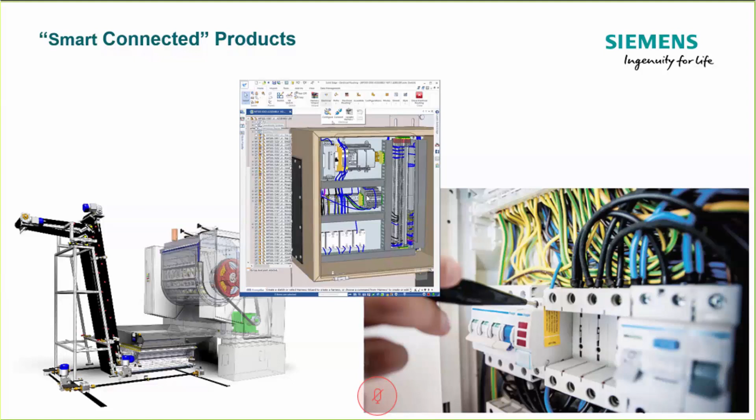Another good use for Solid Edge Wiring Design is in industrial machinery. Here we're showing what that would look like, where this is also referred to as panel design or control panel design. In this case, the end users are not so much interested in doing the harnesses that need to be routed through an assembly, but what's very important for them is to have that logical wiring diagram and the intelligence associated with it, so they know how these devices are connected together and do that very efficiently. So keep both of those in mind. Those are both very good fits for Solid Edge Wiring Design.

The leading industry technology. In 2017, Siemens acquired Mentor Graphics and picked up a lot of great technology.

But for today's discussion, we want to focus on Capital, which is an enterprise-level electrical systems wiring and harness manufacturing. It's been targeted for decades for the aerospace and automobile industry. Leading industry technology, best in class.

And the good news is for those of us that support the small and medium-sized businesses, this same software technology has been leveraged into the Solid Edge portfolio, and that new product name is called Solid Edge Wiring and Harness Design. So what you want to take away from this is that the software is the same, so it's not new software. Leading industry, very mature, lots of users, but it has been repackaged, rebranded for those that are working with Solid Edge or the smaller and medium-sized businesses.

So the price point is much lower, you get access to the technology, and the implementation is simplified because there's less configuration associated with it. So it's really important to understand where the software is coming from: the name is new at Siemens, but the technology is the core software from Capital, from Mentor Graphics.

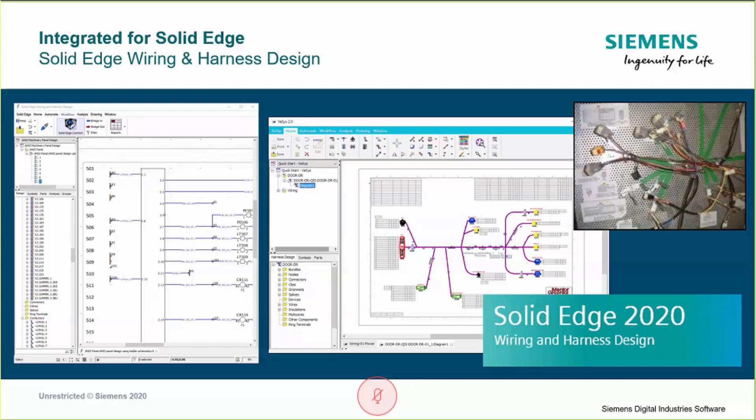And that's just underscoring the fact that they're typically working in isolated environments, and they don't really communicate back and forth regularly. And because of that, it's very difficult for them to be sharing the design data as they're developing this particular product. And the information exchange is very manual in nature and tedious. And that challenge actually gets more pronounced, especially if the electrical system is being captured in 2D drafting tools versus an intelligent wiring diagram. It really makes it difficult to share information.

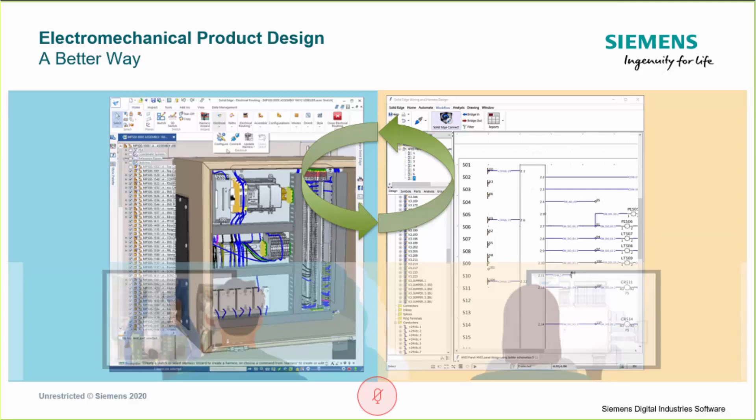So what happens is they wait till the last minute to make the exchange of data, only to find out there's issues and constraints that they didn't have before. And it makes it very difficult to come up with the options to resolve these challenges. So that's the traditional approach. But there is a better way, and that's what we'll be talking about today. Bringing those two environments together where we can have this bi-directional communication so it makes exchanging of information real easy in real time. So we can do it at the very start of the product design and continue that through the entire cycle.

So this is a good time now that I can introduce the software modules for Solid Edge wiring and harness design. So on the left-hand side here, I'm going to first introduce Solid Edge wiring design, far left. That's where users actually capture their wiring diagrams by selecting parts and symbols from an electrical parts library, which is part of the software. It's a centralized electrical parts library. As the wiring diagram is created, there's design rule checks that are running in real time to make sure electronically and electrically the diagram is sound and not violating various rules.

Also, it supports simulation, where the circuitry could be analyzed to make sure the function is proper as we look for the desired behavior. And we can also look at metrics like current and voltage to see that we have the wire size proper, for example. I'm going to show you that later in my demonstration.

Now, tightly coupled to that is Solid Edge harness design. And if you're one of those customers whose end goal is to manufacture harnesses, you will be leveraging this piece of the software. The wiring design content, the connectivity, is synchronized into the harness design. So that doesn't need to be recaptured. And then in the harness design, the user would add the physical pieces and elements to develop and build this harness. That would be the clips, the grommets, the insulation, and things like that.

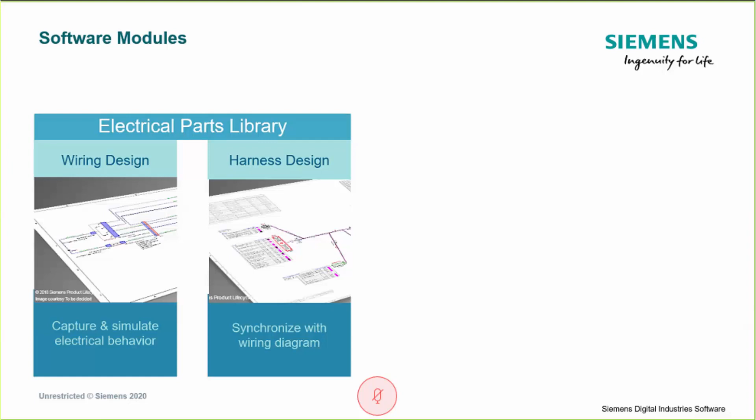All tied together nicely in one software install, using wiring design and harness design. So that's for our electrical systems colleagues. For the mechanical folks, they're shown on the right-hand side. They're in the Solid Edge MCAD.

And what's important there, in order to share information back and forth with our electrical systems team, we need the Solid Edge electrical routing shown here. That enables us to receive the wire content, have the ability to bundle them together in a harness, route them within the 3D assembly, and then send the information back to the wiring design schematic so we have the proper wire lengths.

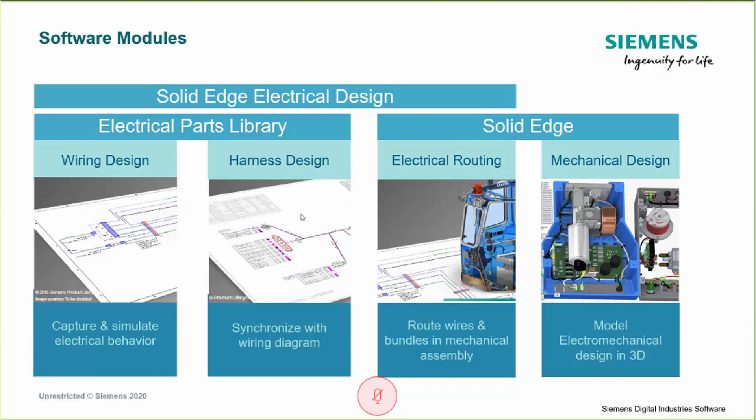This is what we're able to create with this integrated environment, bringing together the mechanical team with the electrical engineering team. So those are the names of the software that we'll be talking about today. My focus is on Solid Edge wiring design for this particular webinar as opposed to harness design. So we're just taking the wiring design. Perhaps at another time we'll focus more on the harness design.

So what I want to introduce and have you remember from this webinar is that Solid Edge wiring design will create intelligent diagrams, and you'll see what I mean by that. We're going to be building the diagrams by selecting symbols and parts from an electrical parts library to make sure the content we put in the diagram is correct. And you'll learn that we have features like styling, which enables you to have your company drawing standards followed by the entire team. It's automatic. It makes the schematics and diagrams easier to read and share with others.

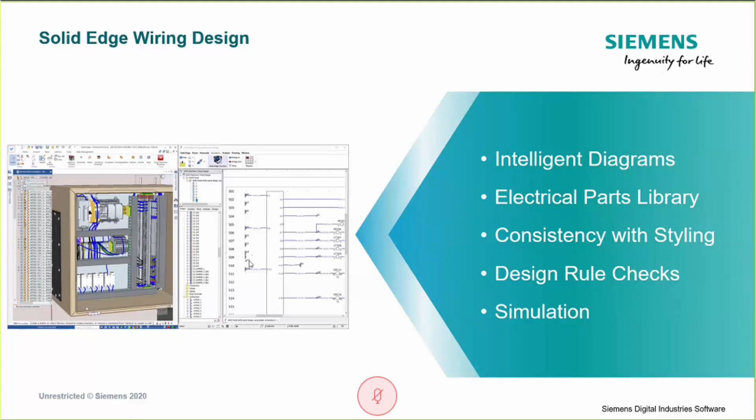You'll learn too that there are design rule checks running in the software in the background to make sure we haven't violated some type of electronics check that is important to us. And then also there's simulation. So keep those in mind as we go through the webinar. For the electrical parts library, there is a starter library that comes with the software. Currently, that starter library has over 4,000 symbols and parts, and this is where you do your component management.

Now, your team will also add your own symbols and parts depending on the industry that you're in and the standards you want them to look like. But the main thing is that's the core underpinning of this software, so that your team is selecting parts from the same centralized library. That's your golden IP to make sure that what you put on that schematic is correct. It has your company part numbers and any other information you want associated with that. There's an electrical parts software utility to help you manage this. It's all part of Solid Edge wiring design.

And what's important to understand here is there are relationships to the parts. For example, when you put a device on your wiring diagram, that device has specific connectors that go to it. And those connectors have certain cavity groups and cavity properties. It's very much aware of what terminals can go into those cavities. And for those terminals, what are the wire configurations that go in there? What's the maximum size of the wire? If I have more than one wire in there, what can that size be?

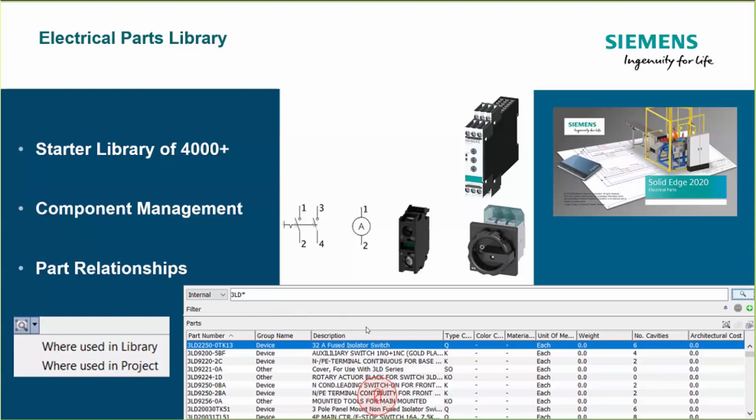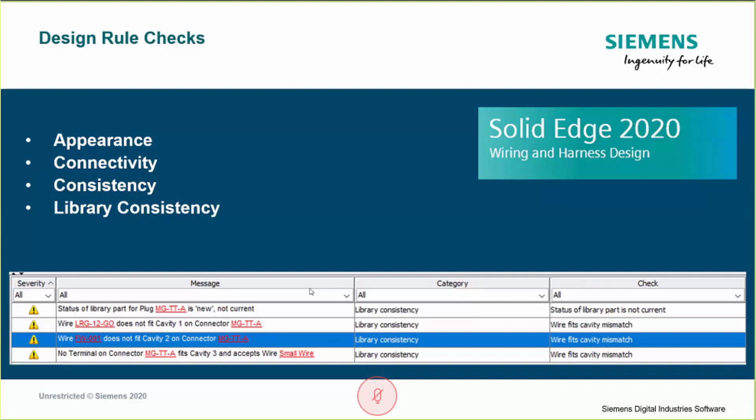And so this check is going on in the background and identifies to us immediately: you've got an issue here, you need to take a look at it. And the red text is a hypertext. I click on that and it brings us exactly into the drawing where this is the case, so it helps us fix and clean that up. So that's an example of these design rule checks that go on for you.

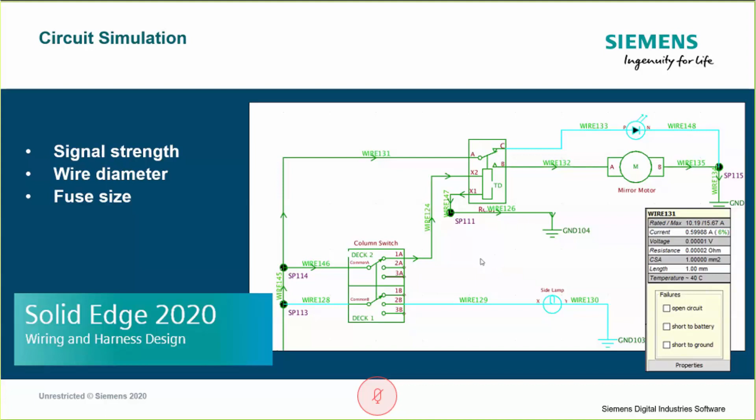Remember, we talked at the very beginning, right? Companies are under a lot of pressure to make their products stand out with electrical features, performance, quality, all of those compliance checks. This is a great tool to let you look at your design in this virtual environment and see if you're on track with the decisions you've made. Should you change the wire diameter, right? What's the impact of doing so? What's the impact to the mechanical design if we can use smaller diameter wires? So this is the tool that allows you to do that.

Now, I'm going to talk a little bit about the data flow because I want to present the big picture of where you enter data and how it's shared, right, which is very powerful in the efficiencies. So to begin, in a wiring diagram application, again, we're going to be pulling the symbols and parts from the electrical parts library. And anytime you're ready to share that diagram with your MCAD team, we can share that information with what we call connected mode. Connected mode is a term we use at Siemens that references the ability of sharing data bidirectionally between the electrical system tools and the MCAD tools.

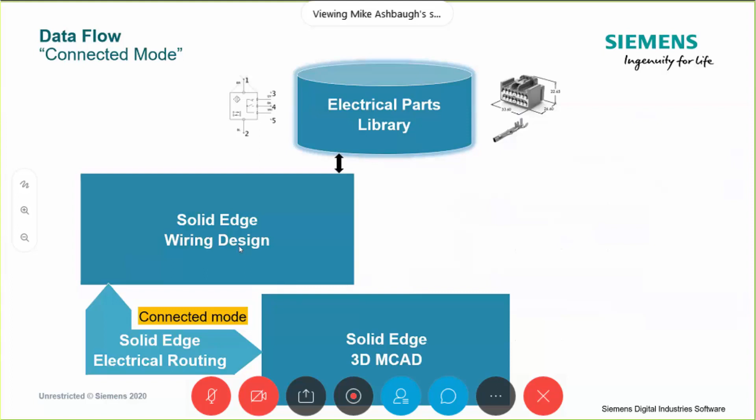So if you look at the image now, we show the connected mode, where the electrical systems teams in Solid Edge Wiring Design bridge out data to the Solid Edge MCAD in the 3D environment. Now the 3D MCAD has the wire information and the connectivity that was created in the wiring design. Nothing had to be recaptured. There's no mistakes with translations. It's not manual in nature. So recall that traditional method where we had the isolated environments. We just bridged that gap, and now we're able to exchange data very conveniently.

Our MCAD team would then bundle the wires together, route into a harness, route those as they need to meet their constraints, again, trying to optimize their design for space, weight, whatever that is. Once they're done, the length of the wires can now be shared back to the wiring design with a push of a button called Bridge In. And I'm going to show you this connected mode as part of my demo.

Now with the Bridge In, the electrical system team has the actual lengths of the wires. And because we can do simulation, they can now look at this again and say, look, if these wire lengths have changed, if they're longer than what we assumed, will we still get the performance? Will that signal with the wire diagram we have designed now actually reach the receiver so that the signal is strong enough for the voltage? If it's not, we would run the risk that the behavior of our electrical systems would not work properly.

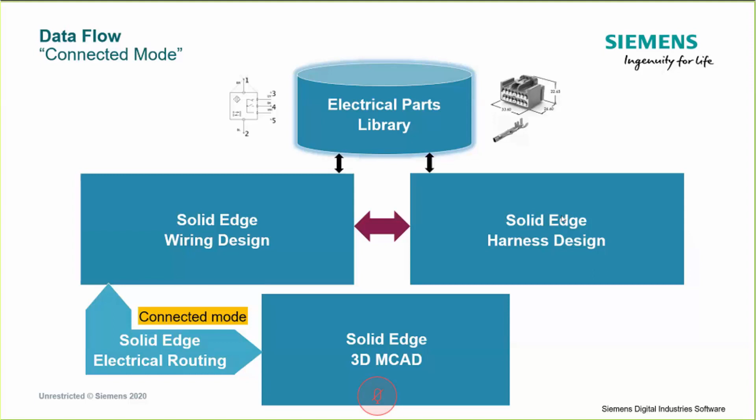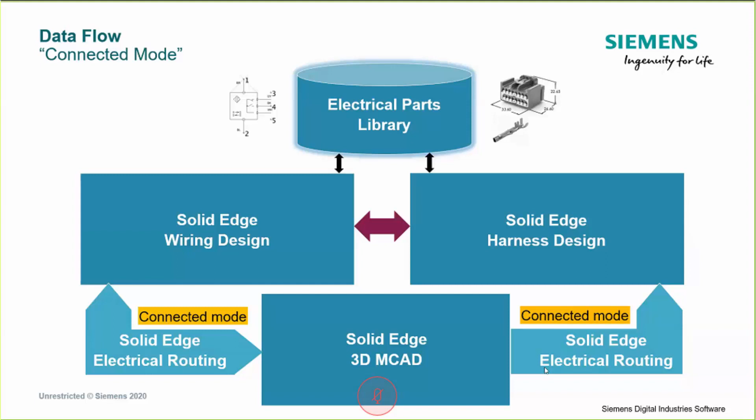Okay, I'm going to get into the demonstration here and show you the Solid Edge Wiring Design. I'm going to assume everybody can see my screen properly. Okay, you're looking now at Solid Edge Wiring Design, full screen.

And what I'm going to do first is just bring up a project that's somewhat completed and show you the anatomy of a project. How is the data organized? How do you find what you're looking for? And some of the outputs we can generate. And then I'll move on to show you how easy it is to create a new project, a simple little circuit, and run a simulation.

So I'm going to open up a project here called Electrical Systems. Let's take a look at that. So I'm looking at a project browser here. The name of the project is called Electrical Systems. And in this project, I can have more than one design. And the designs are shown in the yellow folder. So I do have a design called Analysis. There's a design called Connected Mode, and so on, all the way down to Wiring.

Each design can either be a wiring design or it could also be a harness design. Let me just show you what a harness design looks like. We won't go into more detail, but double click and I bring up the diagram for the harness design. And what we're looking at here is all the details that are captured in order to build this harness, if that's what you're going to do.

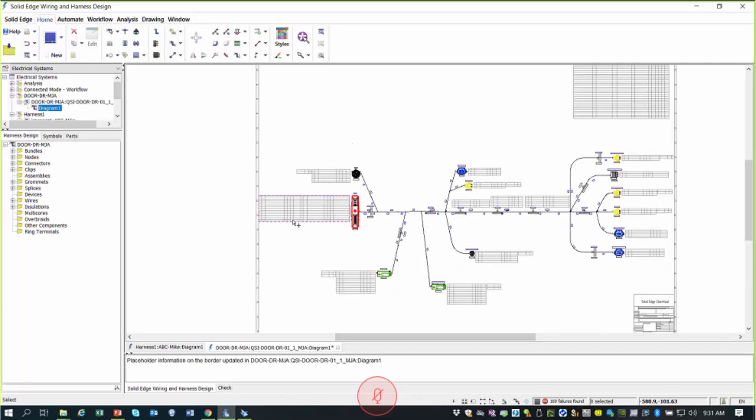If I zoom in here, these are all the cavity information for this particular connector. All this information comes from the electrical parts library, and we have everything we need. And from here, we can generate the documentation to actually have this harness built. So again, we'll save this for another webinar some other time, but that's the harness information.

So let's go take a look at a wiring design here. This particular design called Wiring is showing 10 various diagrams or sheets, all consistent with the same design. If I double click on number 7 here, this brings up that diagram that has been created and captured. What I first want to point out is once we open up a diagram, we now get the design browser shown at the left-hand side.

The tool automatically organizes these subfolders in our design called Wiring. So we have devices, connectors, inline, conductors, multi-cores. That's automatically created. And as you add elements onto your drawing, the software puts those in the proper location so you can find them.

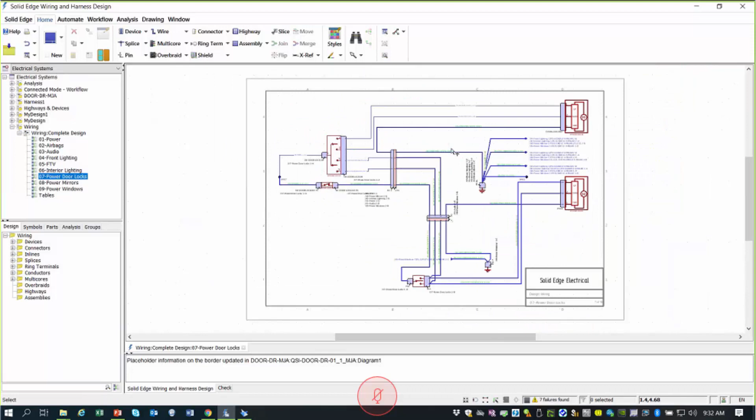This tool is very advanced. You've got the middle mouse wheel and it supports strokes where you hold the middle mouse wheel down. Those of you that have used some high-end digital capture tools, it's very common in those tools. When I select an element in the drawing here, notice that it also cross-probes with my design browser. And this is in the devices.

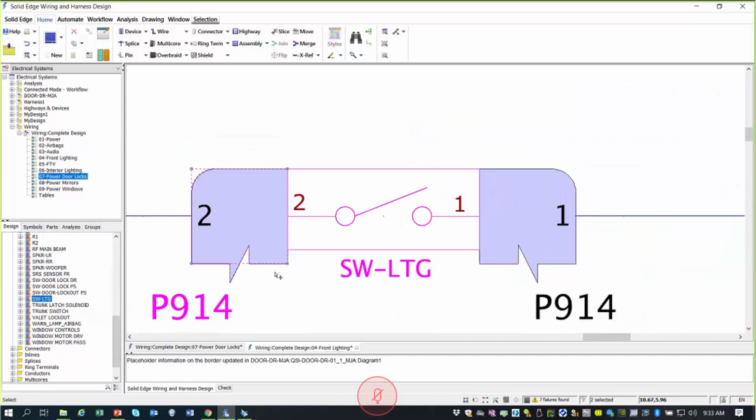Now you can see there's a long list of devices here. And that's because it's showing me all the devices in the entire design, which consists of 10 sheets. If I go in here and I find something like this, I say, where is that? I can hit the Z and it'll browse to that particular drawing where I can find that device and take me right to it. So it opened up the drawing and found that for me. So it's a good way, as your design grows in complexity, to be able to find that.

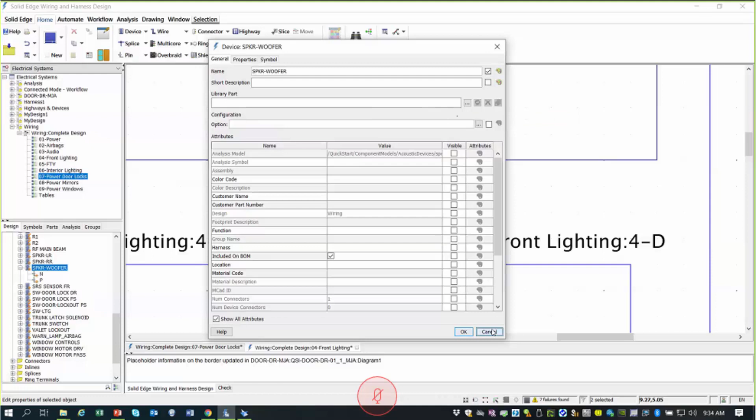And all the properties associated with the device in here, we can change those properties and view those properties with the right mouse button. And you can change the name here in the design browser, or you could change it in your contents window on the drawing. And you're going to see later on that this important field called library part is where we can do queries into the electrical parts library, and then add the parameters that are associated with the part.

The other thing I want to show too is sometimes you just want to isolate the view for the active schematic. And we can do that by toggling this button down here. And now it's just going to show me the devices that are associated with this active schematic sheet here. So that's actually how that works, and how we navigate through the project.

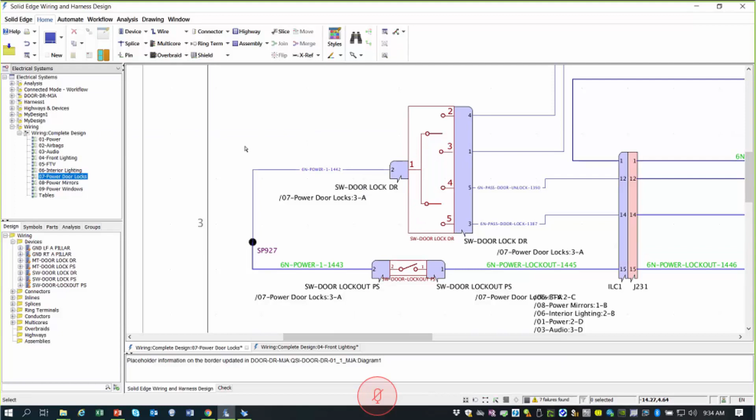The other thing here is, let me go to the styling here and point out a little bit. Here's a wire. Again, all the elements on a drawing have properties. I can do a right mouse button, properties, and here's the color of the wire, the name of the wire, the material, or it even has a part, right? So you have all the details, and I can make changes here. If I wish, I can make changes in the design browser.

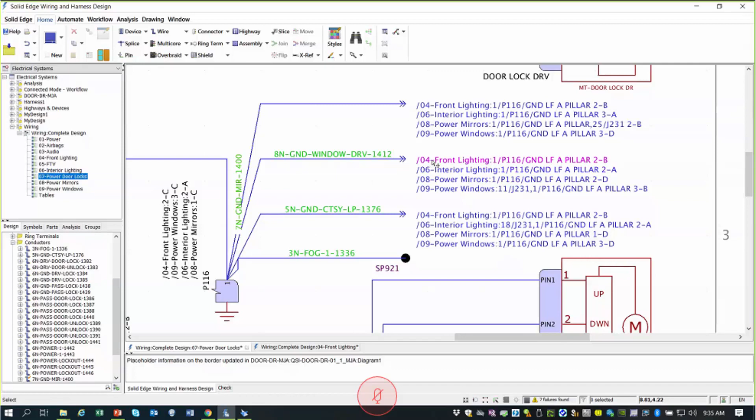But for styling, what I wanted to show was this wire may be in some other place in our drawing somewhere. In order for us to find out where that is, we can put on these off-sheet references. And this is an option that your team gets to pick. And in this case, if we're looking at this one and say view related items, it's showing us where else we could find that. So I could click on this and it would take me to that spot where I can actually find that other wire.

And what we're looking at here, the syntax is what I wanted to point out. These are called off-sheet references. Your team gets to set these in the styling set. So what is the syntax you'd like to use to describe where we can find this wire? In this case, it says go to the drawing name. That's what the 07 power door locks are, for example. It has the component and the pin number that you can find it. And at the very end, the 3-D, that tells us in what quadrant within our title block we can find that. So if you wanted something shorter or different, you can do that all in what's called the style sets.

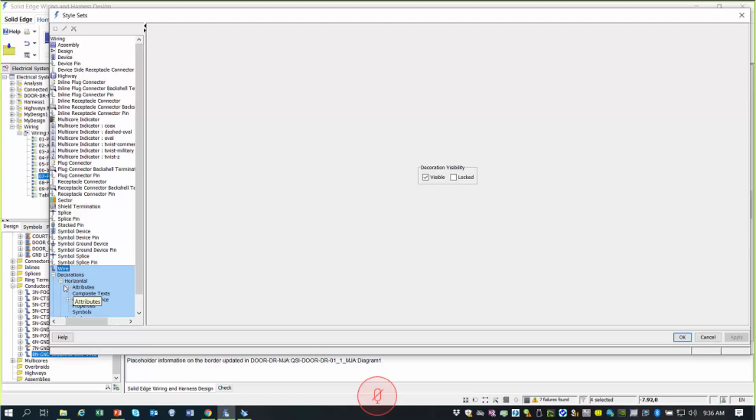And to find the style sets, I right mouse button after picking an element, I hit style, and I hit edit style. And it brings up this style set dialog, and it's highlighted in blue. Where can I find the details to actually change the name and the naming conventions? So this is where your team would decide how you want it to look. That's stored in the style set. And now anyone using the tool in your environment will have the same look and feel when it comes to creating the drawings. And that just makes companies able to standardize, right, and make the designs readable.

Okay, what's important here, once you've captured the details here, it's important that you know how do you share this data with others that need it for field maintenance or something like that. One of the things we can do is take this data in the schematic and generate a PDF for it. There's a really easy print to file. I can set the scope. Do I want to generate the entire project? One of the designs within the project, I can pick all that. And then you have naming conventions. How do you want to name the files based on some of these smart parameters?

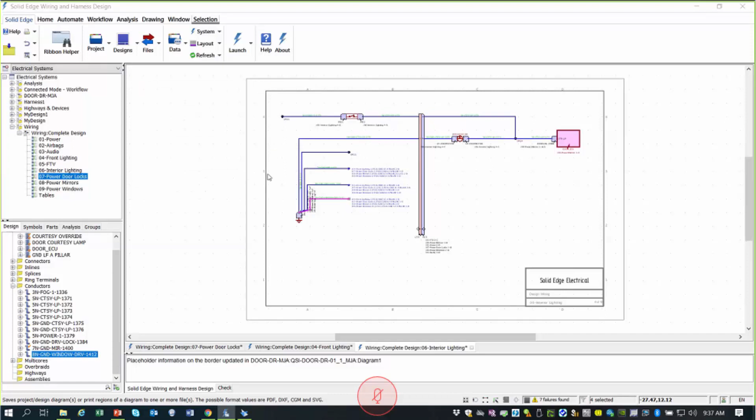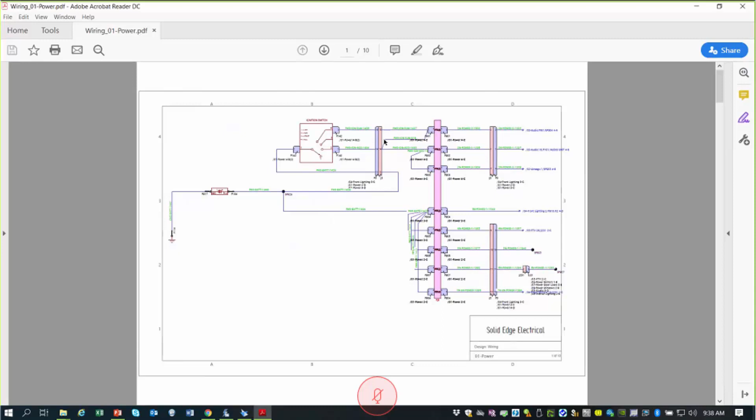Let me just click OK to just get this going quickly to show you that. And then in the output window down at the bottom, if I just double click the name, it'll bring up the PDF for me. And so here's my 10 sheets. I can browse just like I could in the design itself over here by picking this up, and I can navigate through this. So this is pretty powerful. A lot of times people need a printout of their design because they need to share it with their team. And you can search this. For example, you can do Control F and hit search and go find quickly where these wire names are or a component or something like that. So let me just close the PDF real quick.

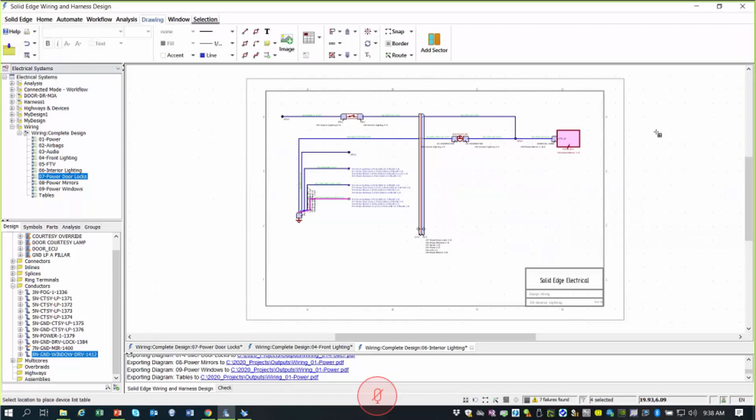And then another thing real quickly before we leave this project, under the drawing tabs, there's a number of tables that you can create. You can create a diagram list, a device list, a wire list. This, again, is the benefit of intelligent wiring applications. All the content that you need is captured in the drawing. And then you have access to it through tables and lists. So device list, for example, automatically generated. I can place this list anywhere on a separate sheet, wherever I want.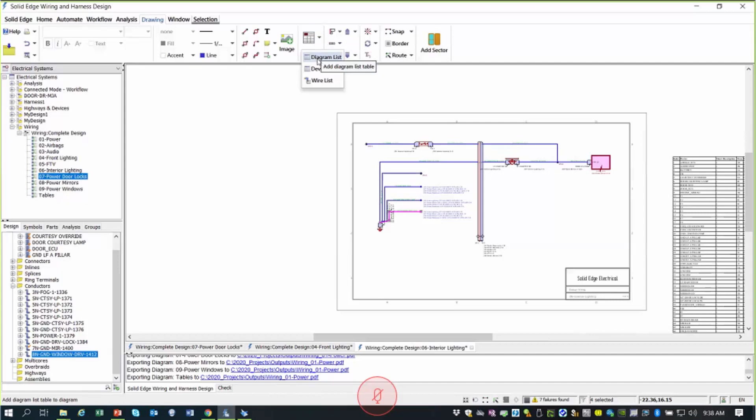You went right to my cursor. I'm going to just zoom in so you can see this. This is actually a dynamic list, right? So if I change any device on my drawing, it will update this automatically. And to show you what I mean by that, let me do a simpler case here. This will show me the diagrams that we have in this design and the name of them.

And for example, if I go to my diagram number 2 and I say, look, I want to edit this, and let's call it airbags 3, click OK, and now it updated that. So again, I wanted to emphasize that that's the benefit of intelligent wiring software, because you enter this in one place and it gets updated and it automates this process for you.

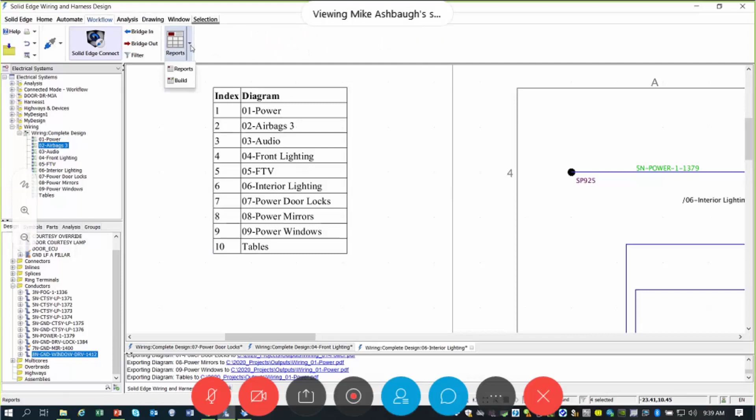Under the workflow, there are a number of reports here. You can pick a report, design wire list. You can view the report. All the reports are generated and then they can be saved off as well. Again, automatically done for you. And comparing this to the traditional method, where we capture the lines and circles and then you have to manually put the bill of material together, huge time saver. So that's what I wanted to highlight here. If you need a custom report, there's a report builder there as well.

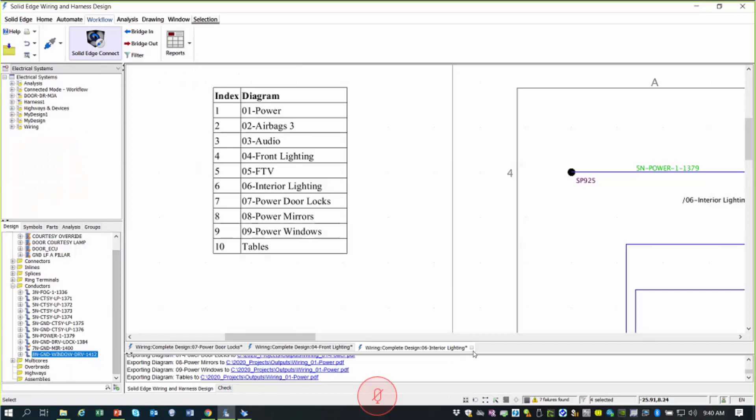So let me just close this project down, and I want to show you how we create a new project. See how quickly we can do that. So I'm going to do in this project a new wiring design, and I'll just kind of go with the defaults here. My design. Notice the red. That's indicating that I already have a design with that name, so I need to change the number. It makes it unique. That's part of the design rule checking that's going on. And we can automatically create a diagram. Let me just do that real quickly in the interest of time.

And now we've created a new design called My Design 4. Now notice down in the design browser, we don't see any plus marks in front of those folders, but the software has created the organization for us. So as we add components in our diagram, that'll begin to fill in.

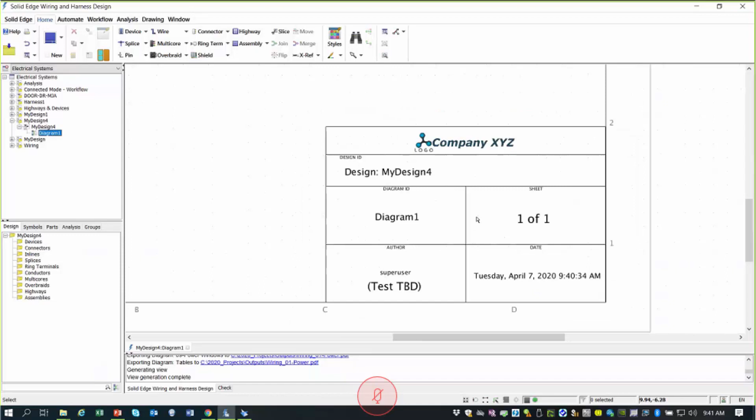One of the things that you'll enjoy is the fact that we can create title blocks customized for your company. Here you can put your company logo in it. And this particular title block has smart properties in there. So you can decide what is the syntax you want to put for the name of the particular drawing, right? And where do you put that in your title block? We can count the sheets. This could say sheet 3 of 10 and so on, when it was created. Who was it created by? Was it reviewed? So all of these standards that you're doing today, we can automate that. And this is controlled through the style settings. Very powerful feature in here.

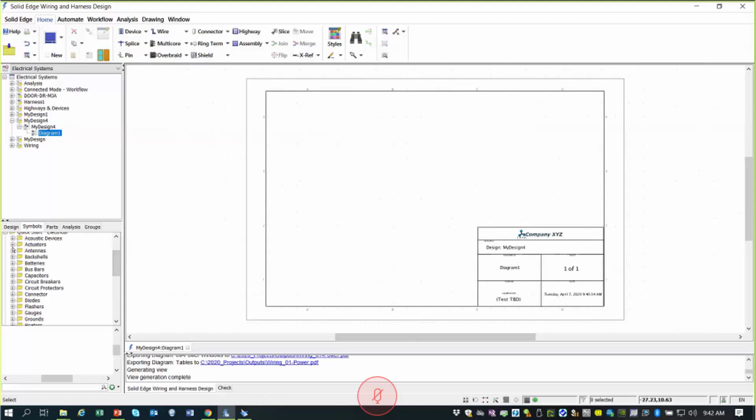So how do we create a new circuit? Let's do one of those together. And I'm going to begin down here in the design view by looking at the symbols. Here's the symbol view into the starter library, or also libraries that your team will add. But I can pick a particular library and I can navigate through it. Again, this would be your names, how you want to organize it. And I'll just pick batteries, for example. When I select on a symbol, it shows me what it looks like. So is that the one I want? Or maybe I want something different. Double click that, and then I can place that into my drawing area here.

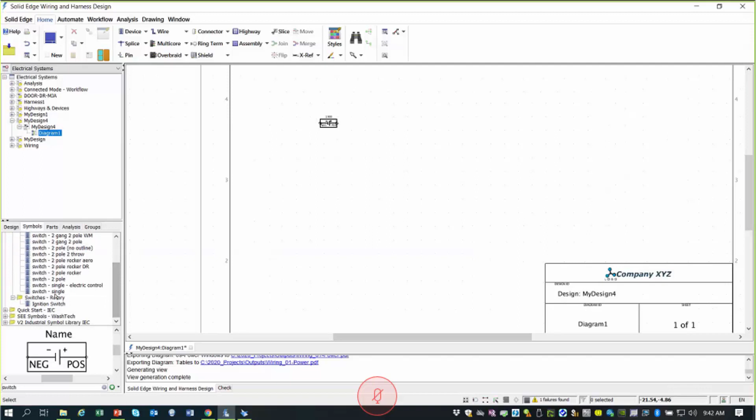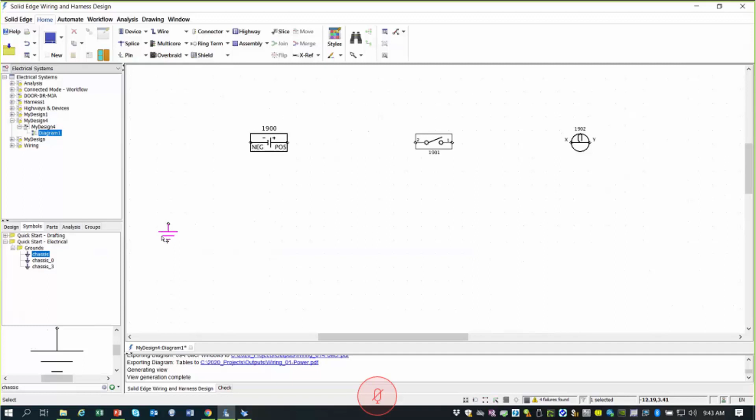And another way to do this is actually look at the filters. So I'm going to go into the filters here and say, I'm looking for a switch, for example. So as I type switch, it's showing me all the library components where I can find a particular switch. So let me go down here. I'm going to use a simple switch here, double click, put that in there. I can zoom in so you can see it a little bit better. Same thing with the lamp. We add a lamp. And then chassis grounds, and then we're good to go. And here I can do Control C, and then I can do Control V to paste it. So essentially I put down those components. If I look at my design browser now, we can see that I have 4 devices in there.

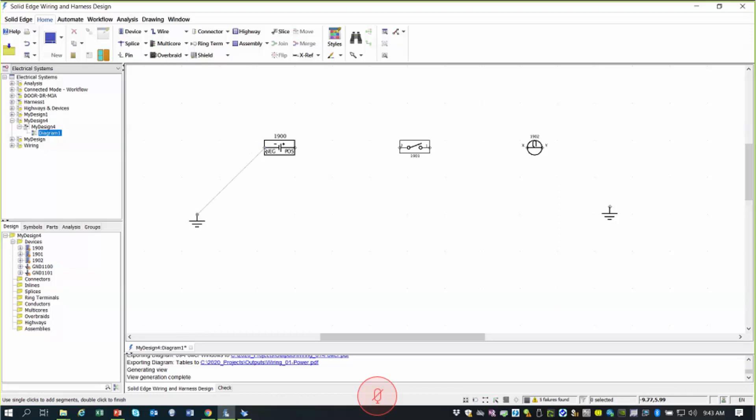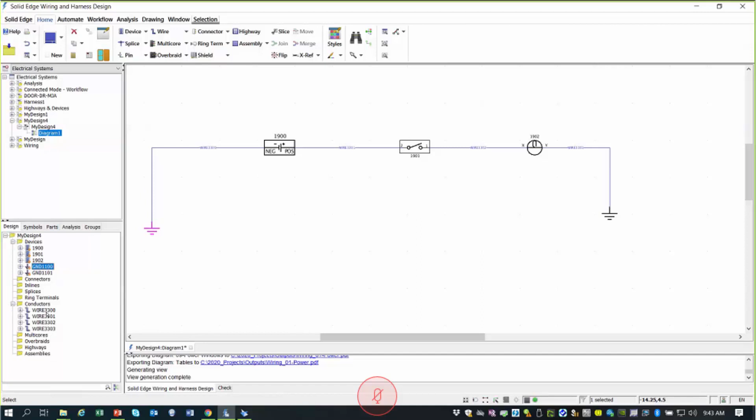And then what we need to do now is add some wires. So all the commands are up at the top, and there's shortcut commands. Here I'm just adding a wire. And again, as I'm doing this, the wires are named automatically. I'll zoom in so you can see that a little bit better. Just adding the wires. Also, I have the routing set on, so it's aware that I want right angle routing. If I want to move this around, it's familiar with the behavior. We'll talk more about that later. Now on the left-hand side of my design browser, we see in the conductors, I have the wire names. So what you may want to do is say, look, I don't like the names of this. I want to go with wire 1, wire 2, and so on.

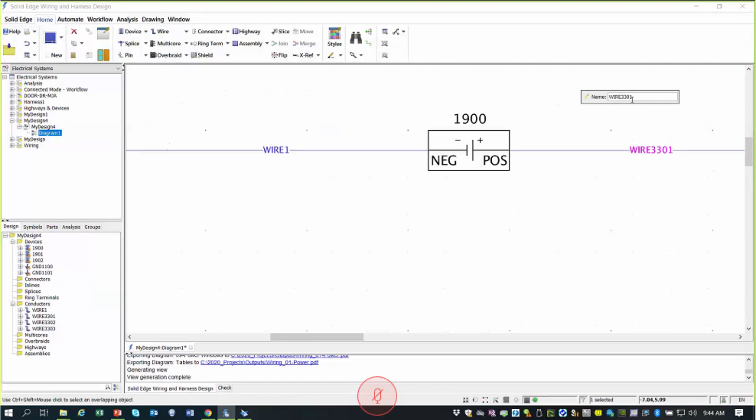Right, they need to be unique. So if I went over here and I forgot where I was in my numbering, if I went to wire 2, again, notice the red. It's indicating, hey, Mike, you can't do that. You got to pick a different wire, something like that.

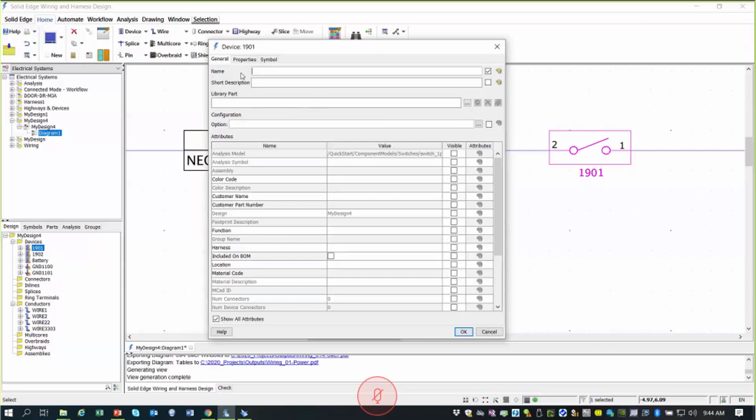Also with the devices themselves, probably don't like that name. So look, I'm going to call this battery. And again, what I'm doing is I'm just working with symbols here now. Notice in this field here, there are no parts. It's just a symbol, and I'm capturing my logic here as I'm wiring this thing up. We go over here and then lamp.

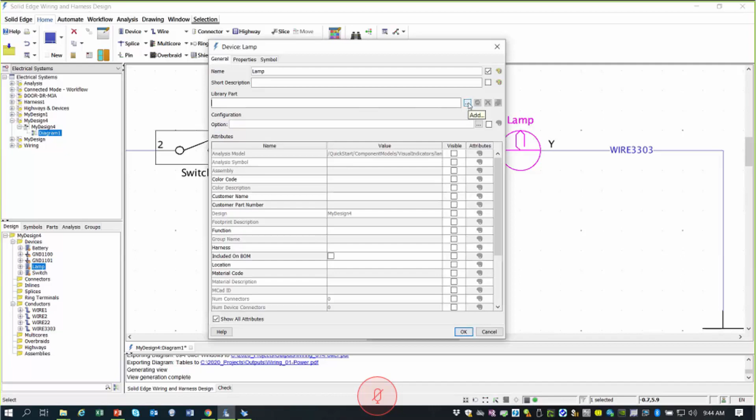Now with lamp, for example, let's say I do want to add a part to this. Here's where I go to the library field, and then in here I can do a query. So this is going to be a query into the centralized electrical parts library. Our entire team would be pointing to the same library because we want to make sure the information is accurate. And now I can do this query here. Let me just click it real quick.

And what it was showing had these default filters here. Show me all the symbols that equal lamp, right? And then it came back and it said there's 2 of them. I can take this filter and I can remove it. And I said, you know what? I want to add a different filter. And so I'm adding one, and now I have these parameters I can search through for the library. Color code, material code. Your team gets to fill in the data for this however you think it's most helpful.

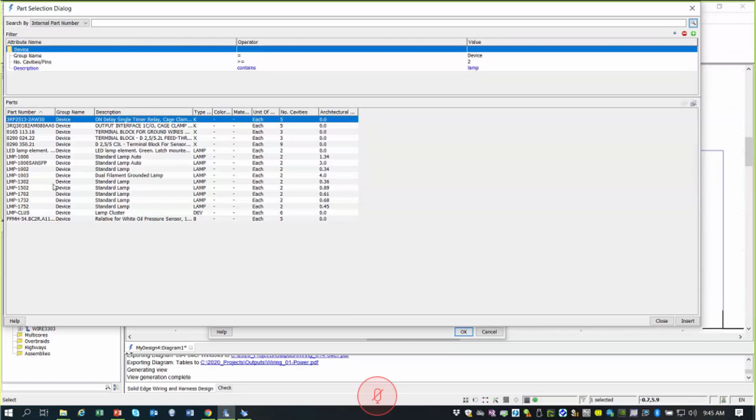I'm going to go with description, and let's do something that says, show me everything that contains in the description something called lamp. And let's see what we get there. So now we have more to choose from. So this is a way of narrowing down for the users to query into the centralized library what's in there that I can use. So if I want this one, I just double click this, and it actually made the assignment to the lamp. So that was just a real quick way to show you how you create a circuit. Let me just move these in so we can see a little bit better.

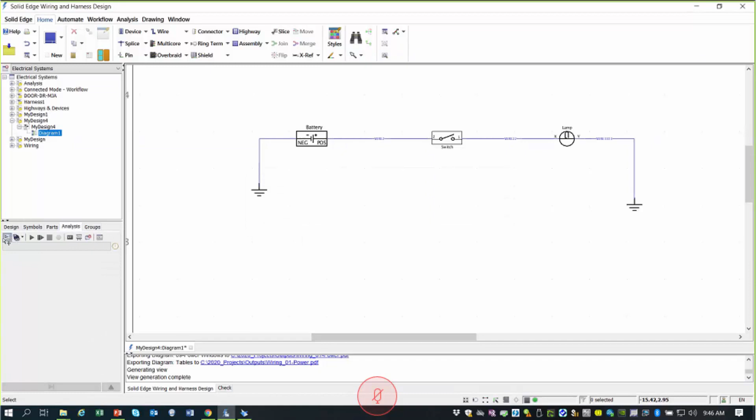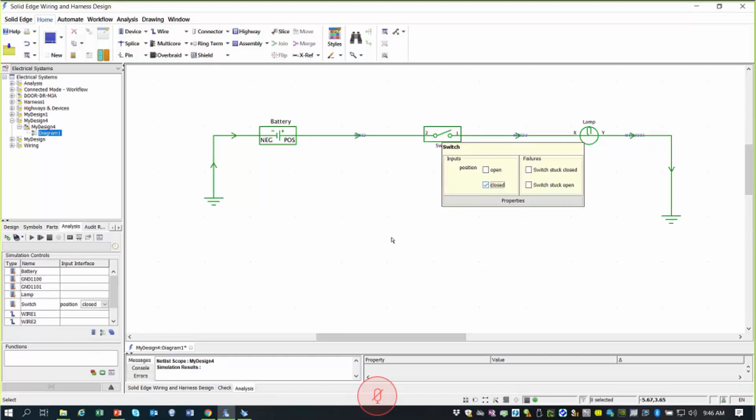And once I have that built up, I'm actually ready to simulate. So down in my design view here, I can hit analysis. And now we have the cyan. And you may recall from the presentation, what does a cyan mean? It means that we don't have current flowing through that. And because this is a functional simulator, I can hover over the switch. And so the switch is open. So what happens when I close it? Again, this is a pretty simple little design. Hey, I'm getting the green current flowing through that, just like I expected.

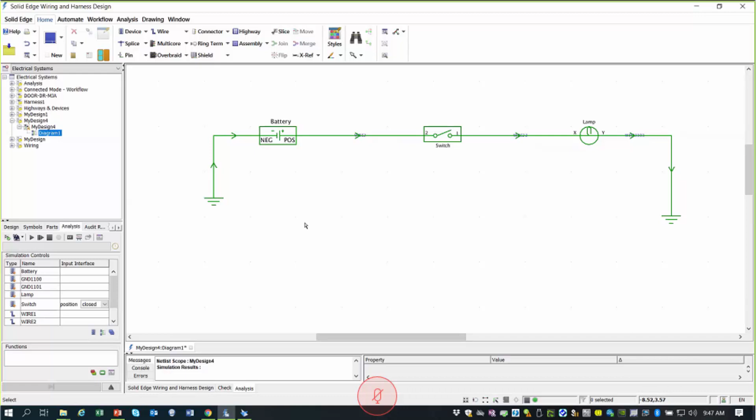If I want to look at the details of the current and the voltage, I can run a numeric simulation and then hover over the wire. And doing so, it actually gives me the current reading through the wire. So the point being here from the presentation, right, I captured my wiring logic together, and I don't have to do any additional graphics or editing to be able to run the simulation for that. Now, this is a pretty simple case. Let me show you something a little bit more sophisticated, and then we'll move on to the next item here.

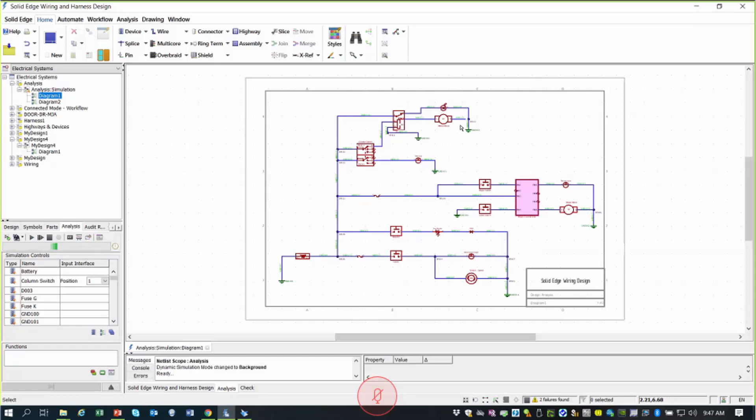Here's a more detailed circuit, same thing. I just hit the analysis tab, do the scope, and I'm ready to run. Notice the green and the cyan, same kind of thing. And here's again the switch. It's like, hey, I just want to confirm when I move this to position 2, is that the behavior that I was looking to get, right? So this can really avoid a lot of issues with the behavior of the circuitry long before you build the product.

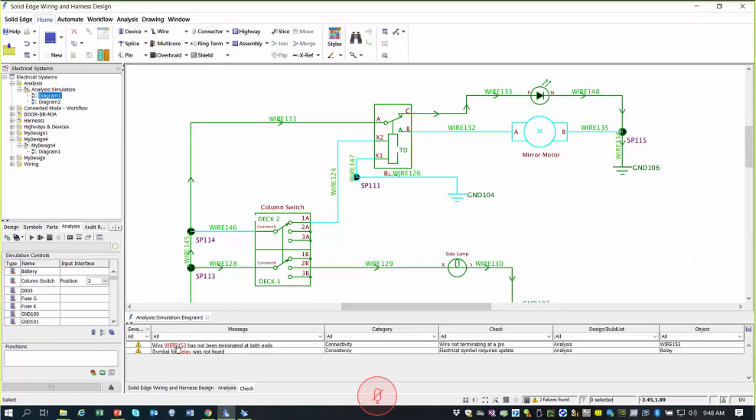I did mention the design rule checks that are running in the background all the time. If I want to see what those checks are doing, I can hit the checks tab here. And here's 2 messages that I got. One of them saying that I have a wire that hasn't been terminated on either end. And what I can do is click this, and then it will take me into that part of the design where we found it. And what I did was I had created a new sheet in that design, and I put a wire in there. I didn't connect it to anything. So again, this is going to help you find where you missed something with your logic. It's not connected properly. That's called design rule checking, and it's running in the background for you.

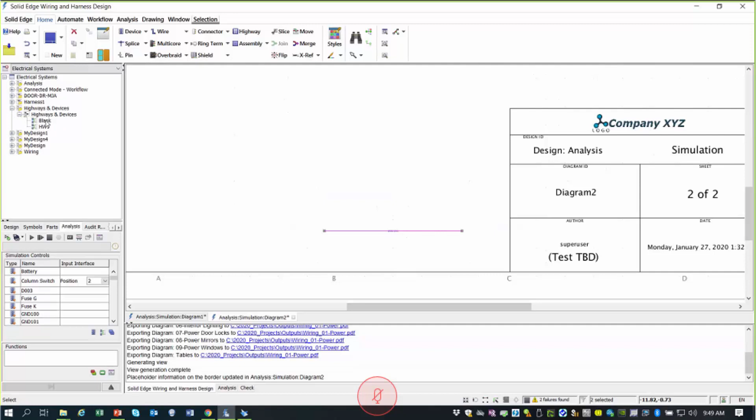Okay, so that was simulation. And what I'd like to do now is show an example, because I've been selecting symbols from your library or parts from your library. What I want to show you is what can we do when you don't have symbols and you're still building up your library? Well, we can use things called devices. And devices allow you to wire up your schematic and diagram, make some progress while you're still working on the symbols, or you haven't decided what you want that symbol or new part to look like.

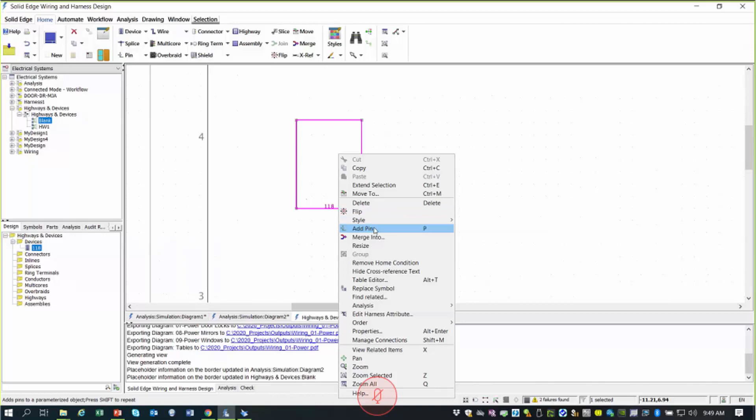So under devices here, I just simply come over here and I draw a device. And notice in my design, it actually shows my devices here. I'm going to narrow the view so we're just looking at this active sheet. Okay, so it just shows that one device. And if I want to add pins, I can do that here, and I just have to place where do I want the pins. And I can just do something real simple like this. Put those 5 pins down. If I'm done there, I can go with that. Or maybe I want to resize this.

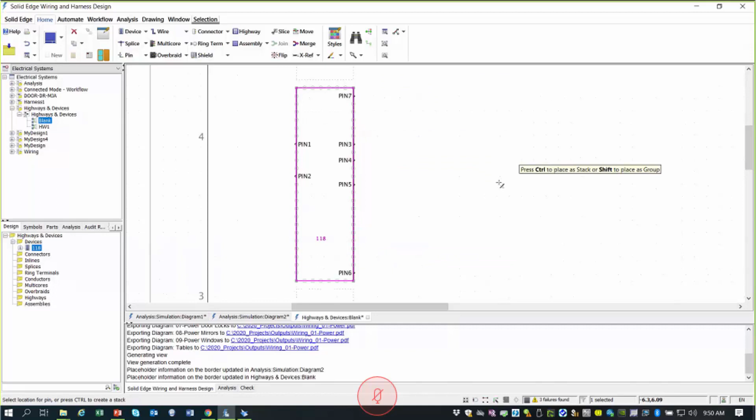So what's really nice about this is, again, I don't need the parts or the symbols in my library to begin wiring this up. If I want to go back and say I need to add more pins there, I just go here. I can even make it longer by selecting the area here as well. So it's a really powerful way of doing that. Sometimes you'll have a device that has lots of pins. So in that case, we'll do this a little bit differently.

In that case, it put all these pins down in this new device. If I go and look at the device over here in the design browser, I can see all the pins here. I can highlight them. If I want to remove some of them from here, I can do that as well. Really a very flexible environment.

And for wiring, I showed an example how to run some wires. If I need another pin on this particular device here, I can run a wire, double click. It actually adds the pin too as I'm wiring up the wires. And then I can undo. Here's a nice feature called multiple wires. Say I want to take all of these here and I want to wire them up over here. So now I automatically ran several wires.

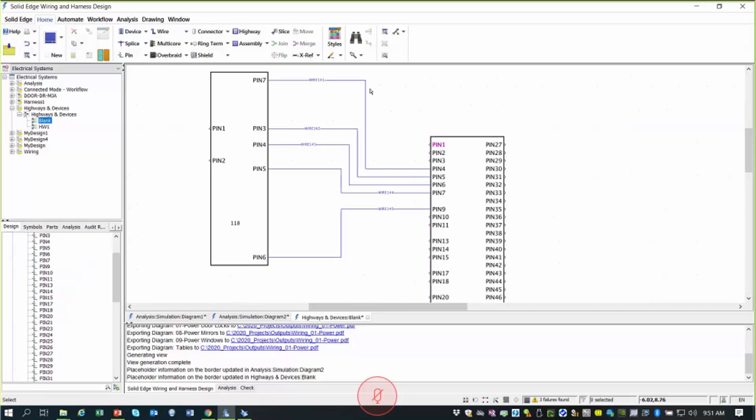Again, depending on how you want to do this, I can rename these wires. And the tool is smart enough. Again, it knows these are wires. It doesn't want them to cross and things like that. So you can move things around. This is really important when you're first getting your arms around that particular initial drawing.

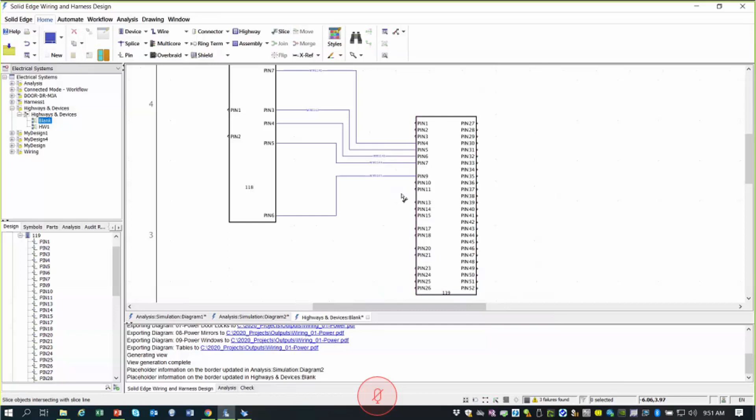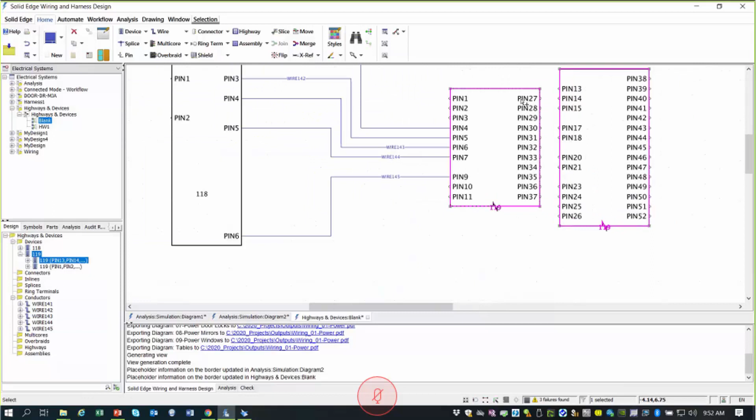One more thing, we have something called slice, or maybe sometimes the part is so big you want to fit it on another page. You can see if I zoom in here, this little lightning bolt type figure is saying that this particular device is the same device, but we broke it into 2 logical components. So again, depending on the type of design, this could really be pretty powerful. Let me do a highway really quick, and then I want to get into the connected mode, looking at the time that we have left.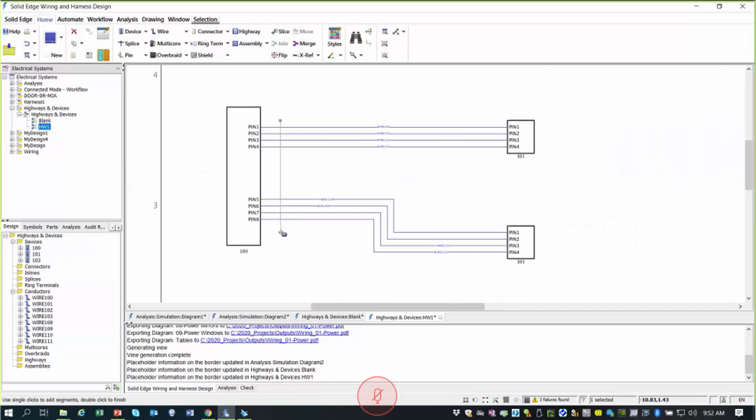In a wiring diagram, sometimes you have lots of wires going around the page, and you want to clean that up. You want to get that white space back. Well, we can do that with a highway, which is a bus for some of you. All right, let me just show you how we can quickly create something like that called a highway. I'll do this quick and show you. So there was a highway that was created, and I say, look, I want to take all of these wires here and I want to route them into the highway and clean that up.

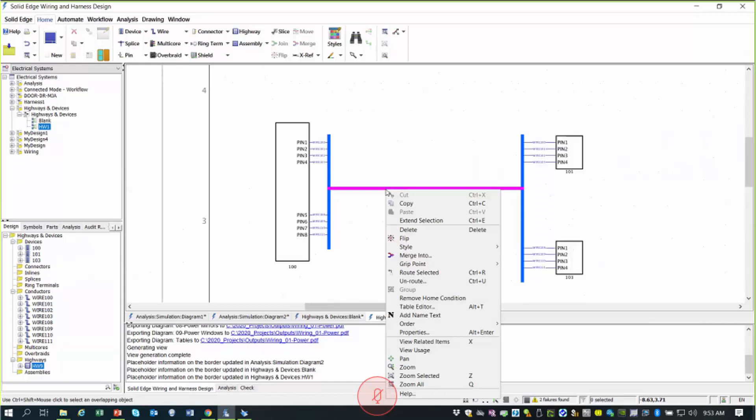So now I have this real nice clean view. Logically, it's doing the same thing and allows me to view that. If I want to know what's in the highway, I can go in here and view the usage. So it actually shows me what's in the highway. Sometimes you may want to pull out a particular wire. Let's take this one because it's a special wire, right? We want to select it, and then we're going to unroute it.

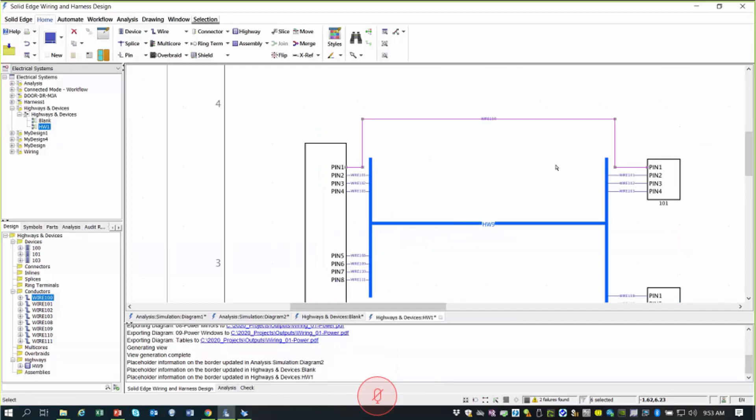And why would we do that? Well, maybe it's a control signal or something like that. We're going to rename it and call it control or whatever. But it just makes it more readable that this is actually going to control access into these devices or something like that. So the gist of this is a very powerful drawing application to get your wiring diagram. Make sure that you can find the information pulling from electrical parts library.

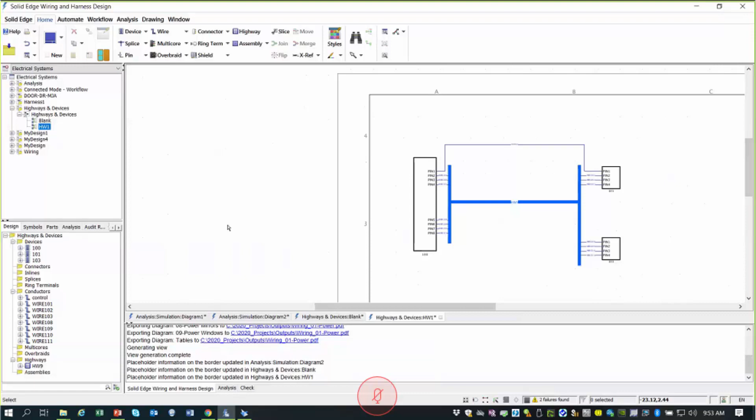So what I showed you there with the Solid Edge wiring design is how we can manage the data there. And for those of you that are using Teamcenter, we integrate with Teamcenter with the Solid Edge wiring and harness design. And you could see with the electrical parts library that was provided, how we can query into that and pull out the symbols and parts that you want your entire team using and sharing.

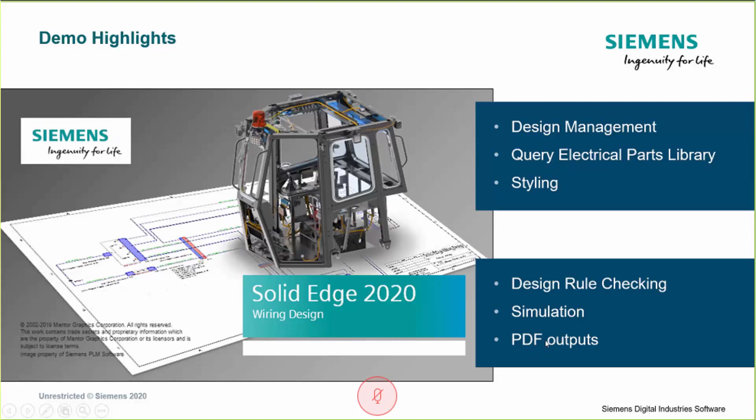We have styling in order to make sure that your company drawing standards can be followed by everyone. There's design rule checking in there to help you with your electronic connectivity associated with your design. There's simulation in there for both functional simulation as well as the performance of the current and the voltage. And it's very important to have the outputs from both wiring design and harness design, and we can generate multiple outputs. PDF is quite common and it's searchable.